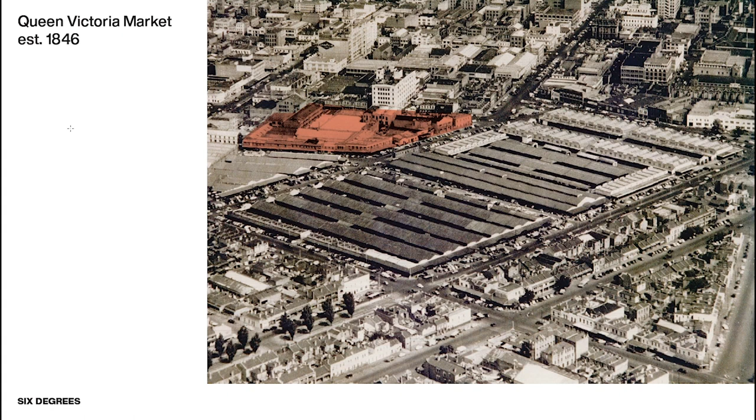A little known fact, the Queen Victoria Market is actually our Sydney Opera House. It's the most visited place in the City of Melbourne. So it generates an incredible amount of foot traffic, but it also has limited hours of operation. So part of the idea of this redevelopment by the city was to increase the time clock of the market precinct and to make it operate over a longer period of days and a longer period of the day-night cycle.

Part of our ideas for the job were, how do we connect to this colour and life of the market, and how do we maximise the activation potential of the building? And architecturally, how do we make a building which is not a singular object, but actually an extension of the city?

And in between is a new laneway.

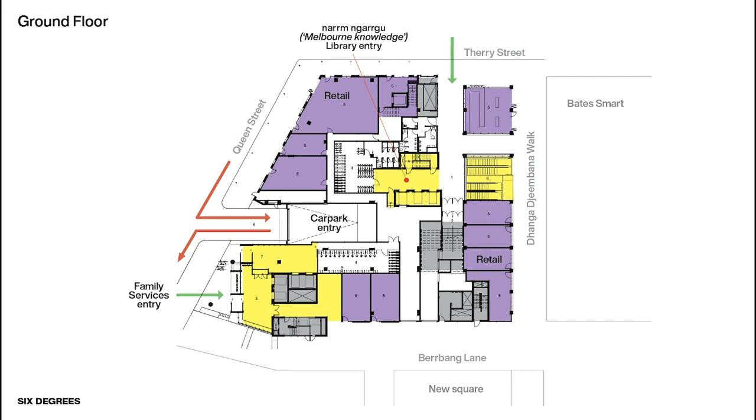Ground floor, Six Degrees believe that 80% should be a minimum of activation on CBD buildings. In this case, we've achieved closer to 90%. The purple is retail, the yellow is circulation and lobby spaces. And it's because of the introduction of this new laneway between the two parts of the project. We've got a building in the round, so it's got 2 main street faces, it's got a new arcade face, and it's got a rear elevation.

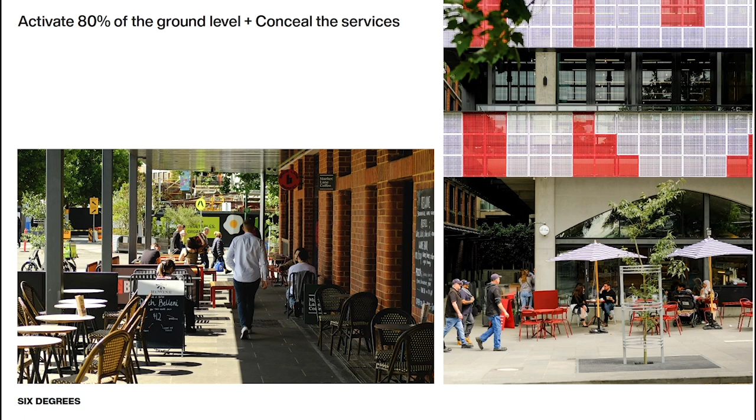Activation, everyone talks about it, not everyone does it. It's not well regulated, but in this case we've got heritage fabric which is incorporated into the new build, and that's the old pub on the corner, the Mercat Cross. So it's returned as an activated precinct, and all of the new fabric down the laneway is also active edge.

This network of open lanes, the permeability of the site was a very important aspect to our success in the competition phase. So the City of Melbourne really recognised that it's a very Melbourne approach. It's connecting the market, which was disconnected from the CBD, back to Franklin Street and further into Elizabeth Street. So over time, we believe this will be a really, really great asset.

So there's one fully open to sky new laneway and a fully open to sky half lane, which is the entry to the library. We've tried to make circulation very intuitive, so nobody's looking for the way into the building.

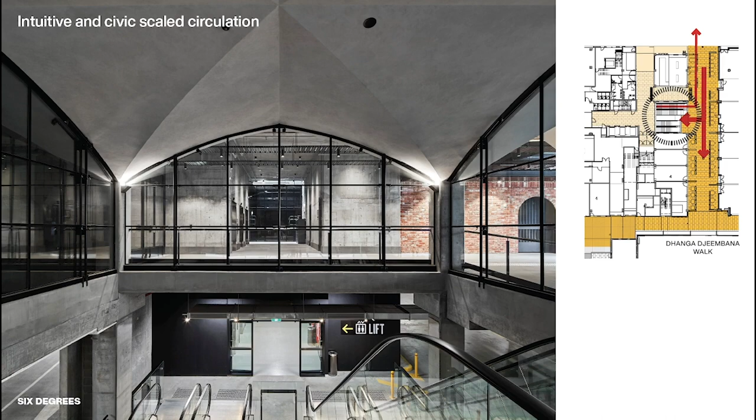We've explored this typology of vaulting for the retail spaces. It's something that you see in Europe, and I think it's a way to soften what is constructed as a very commercial building in many ways because of the procurement process, and give something back to the public which is going to last a long time.

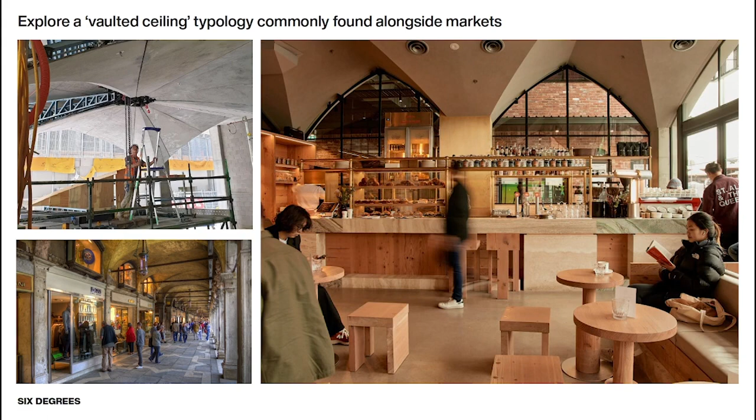What am I doing wrong? Try the mouse. Click the mouse. Up. Okay, oh I've gone back. There we go, I'm good.

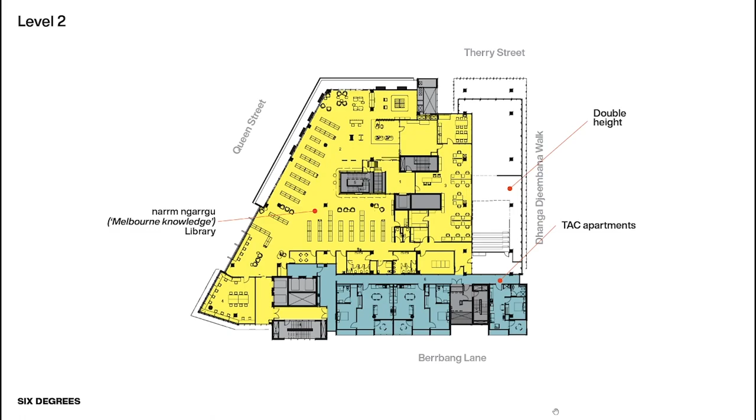This is the main collection floor of the library, and you can see the double height space on the right. To the south side is TAC apartments. That was an element of the brief that went in quite late.

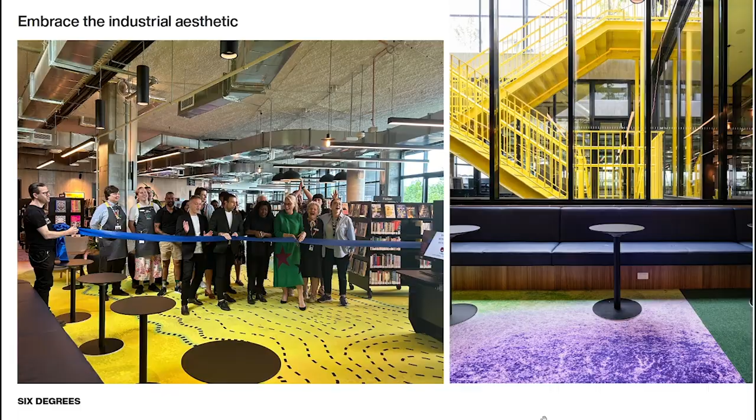And this connection to country was really carried through the whole job. Maree's work is really exceptional. There's more discussion to have, it's a whole presentation in itself really.

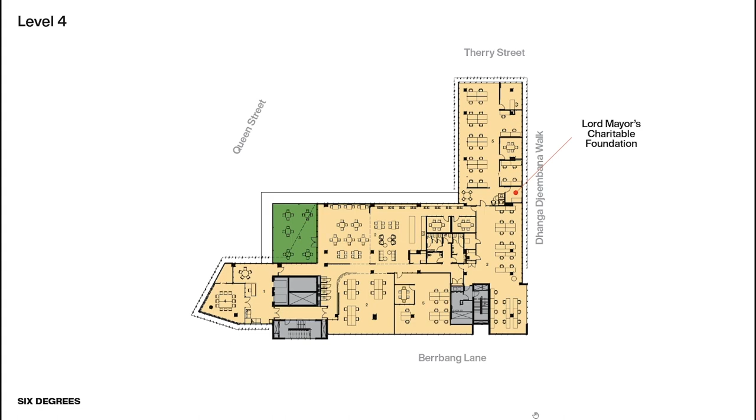The next level is an office floor, which is now occupied by the Lord Mayor's Charitable Foundation, and they sublet space to a range of charity services.

The ESD credentials are Green Star 5-star and WELL rating. For 7 years ago, that's a pretty high benchmark. We've got 56 kilowatts of solar on the building, so in summer it's pretty energy balanced.

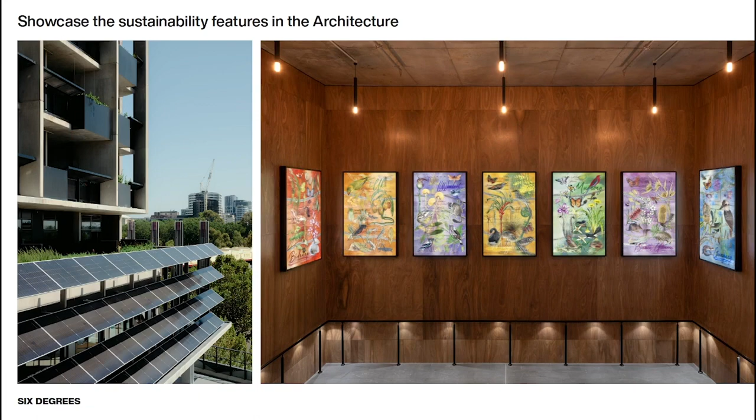Owned by, I'm not sure, but they were in the brief and ended up in our building as part of the competition process.

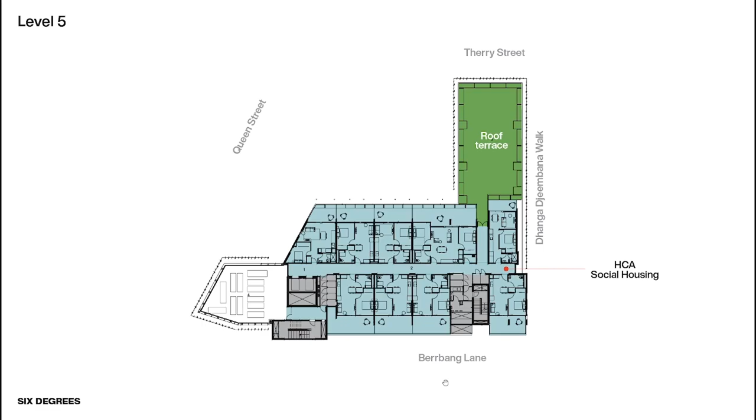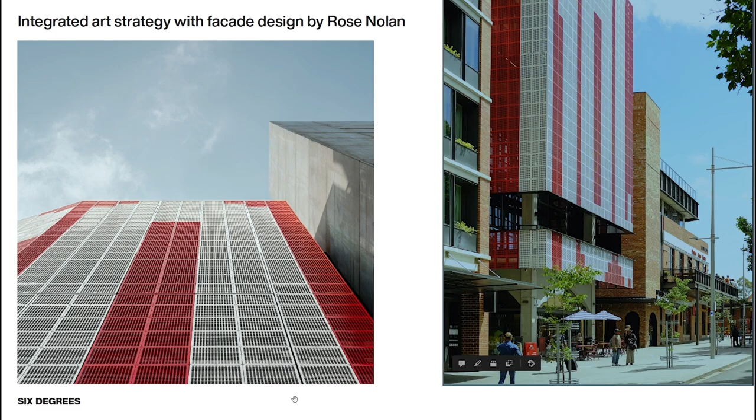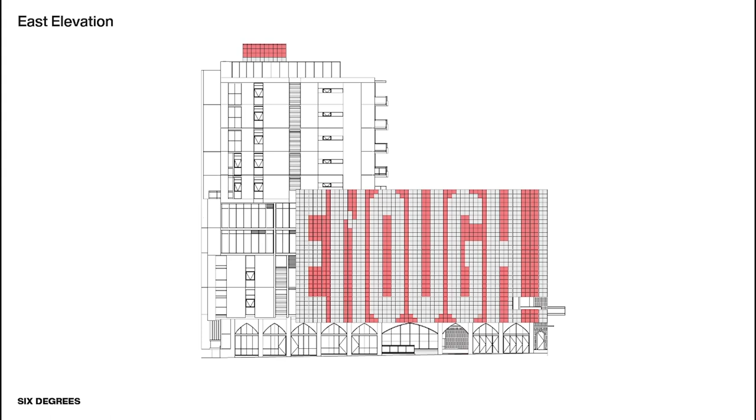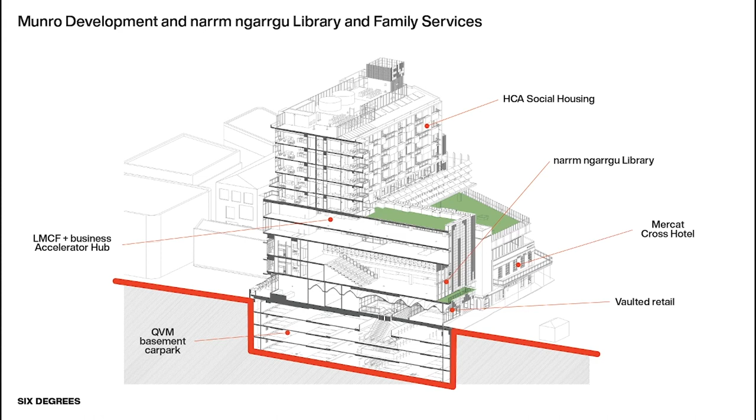I mean, I'm just giving up on technology. I can't do it. It's not you, it's not you.